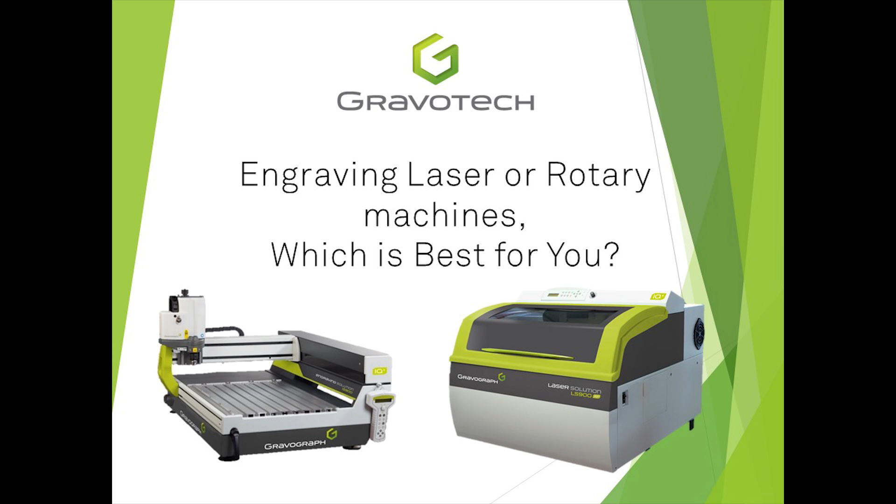So let's get started. During this presentation, we will touch on just a few minutes of who we are, then a look into how to improve your bottom line with laser and rotary machines. We'll dive a little bit deeper into laser specifically, and then we're going to take a look at rotary machines so you can compare the two.

Okay, so who is Gravotech? Why are we qualified to educate you on laser and rotary engraving machines? Well, whether you know it or not, every day, everywhere, Gravotech is in your life. Since 1938, you can find us in the engraving on your jewelry, the VIN number marked on your car, signs in any office, your child's trophy, a serial number on a medical device, and even implants inside someone's body.

How do we do this? Well, Gravotech is built on 3 outstanding brands. Type 3 is our software brand, focusing on 3D artistic CAD/CAM solutions, like designers working on 3D modeling or anything from engine parts to jewelry. Technifor branded products focus on dot peen, scribing, and the latest laser technologies to mark and identify products in the manufacturing sector. And finally, Gravograph products are focused on laser and rotary engraving machines and engraving materials.

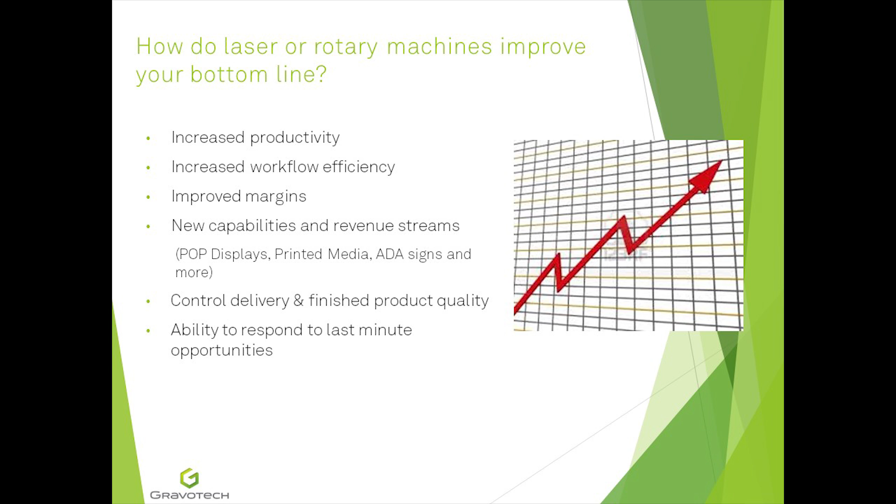You also control the delivery and final quality of the products from your company. When you outsource products, deadlines leave no room for error or last-minute changes. Engraving machines give you the ability to capture last-minute requests and demonstrate a new level of flexibility to your customers.

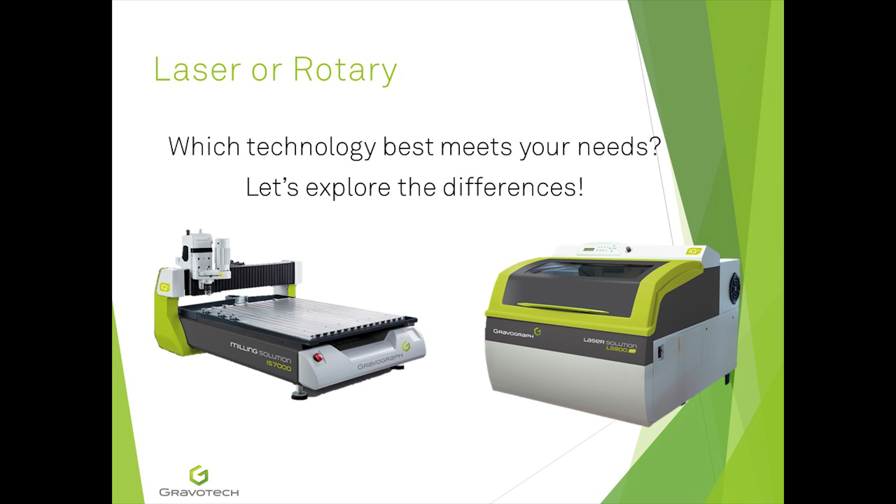So the question is, laser or rotary? Which one to pick is a decision many sign fabricators and engravers struggle with. Let's look at each one so you can have a better idea of what might be best for your company.

So there are 4 different types of lasers from Gravotech. We have a CO2, green, hybrid, and fiber. Depending on the model, these lasers are available in Gantry and Galvo styles. Galvo machines are stationary and can be integrated in multiple positions with extremely fast cycle times. A Gantry laser is a bit different as it moves the laser optics along the X and Y axis over top of the material. The Gantry type machines are what most people today will need.

The Gantry laser is contained within a safe Class 1 cabinet, allowing it to be used anywhere, even in a storefront. So a CO2 laser is very popular for use with signage materials such as wood, rubber, plastic, leather, and minerals such as glass and ceramic, etc. The CO2 laser is also capable of working with certain plastics and covered metals. There are 6 standard sizes and over 25 power levels in the Gantry version.

A green laser is a new innovation from Gravotech. It uses cold marking, which applies minimal heat to the product, which reduces the mechanical stress and distortion to the parts. The green laser can also create extremely small, high-resolution marks with the smallest of sensitive components. Silver, gold, plastic are just a few of the materials that react well with this particular laser.

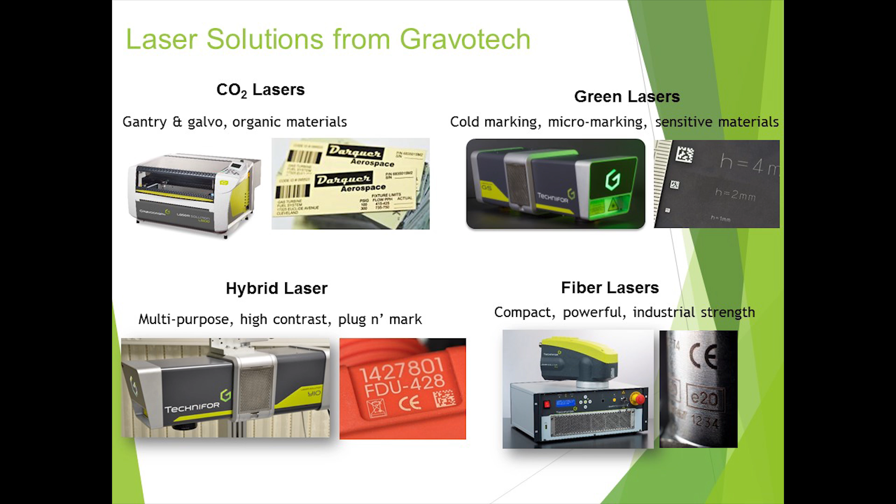And lastly, fiber lasers are ideal for deep engraving. The fiber actually works well with a wide variety of products, but extremely well with uncoated metals.

Let's discuss more about gantry lasers. You will hear a term called class. This defines the safety level of the laser.

Class 1 means the laser energy is completely contained within the cabinet and cannot escape. Class 4 is the opposite end of the scale, where the laser beam is not contained and could bounce off the material and hit something else.

We always recommend only experienced laser users use a Class 4 laser. It's just the safe and smart thing to do.

Pictured here is the Gravograph LS1000 XP. It is a gantry, large format, Class 1 CO2 laser with Class 4 options.

Operator safety is protected with the Class 1 enclosure design. For safety purposes, lasering stops when the cover door is opened.

This is a standard feature with our Gravograph lasers, but be careful when shopping, as there are lasers in the marketplace that don't have this basic safety feature.

It also includes an emergency stop button on the front of the machine for added security. Class 4 operation can be accessed through a unique security code that the owner controls. This Class 4 access allows for oversized materials to pass through the laser and be engraved.

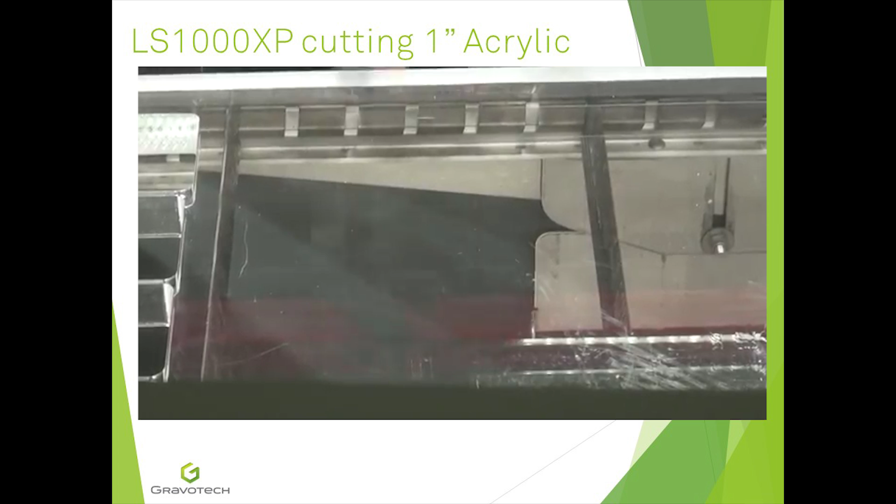Here's a quick video of the Gantry CO2 LS1000 XP engraving and cutting 1-inch thick acrylic to create a football helmet. This is a great example of how you can not only create signs and lettering, but other objects and displays as well.

The lens first autofocuses to give the most precise cut. Then it travels along the X and Y axis, releasing the laser energy at the precise moment to create letters, images, designs, etc.

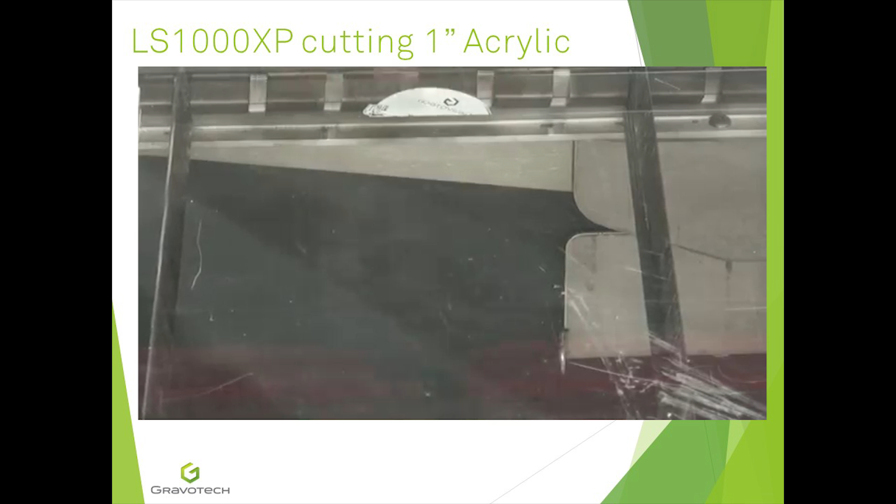You can now start seeing the football helmet design.

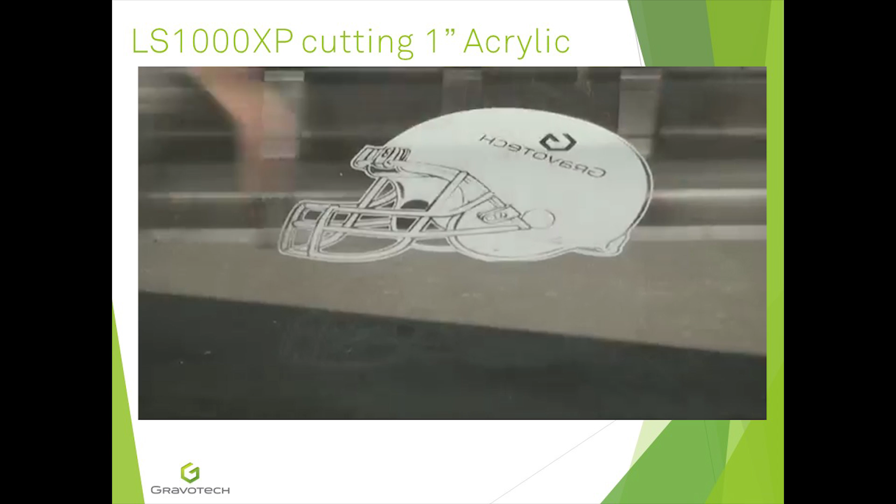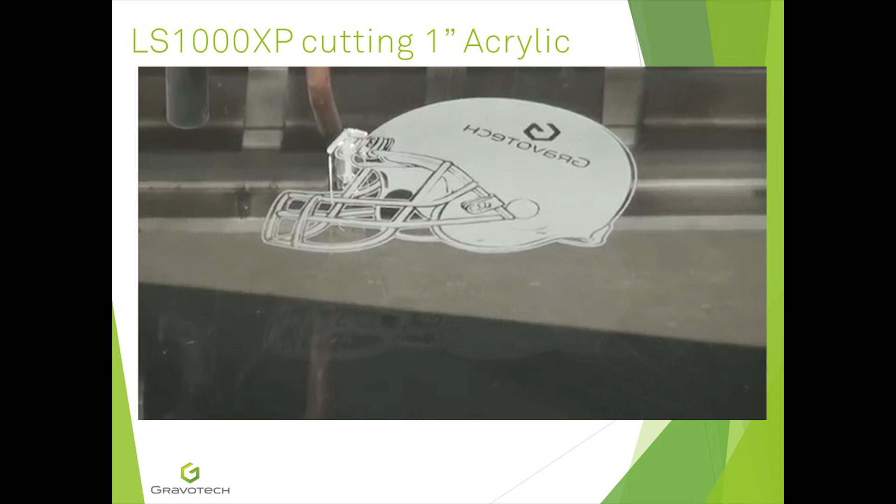Now the laser must cut out the design it just engraved. You can see how easily it cuts through 1-inch acrylic like butter. Using the laser to cut the acrylic produces a desirable flame-polished edge.

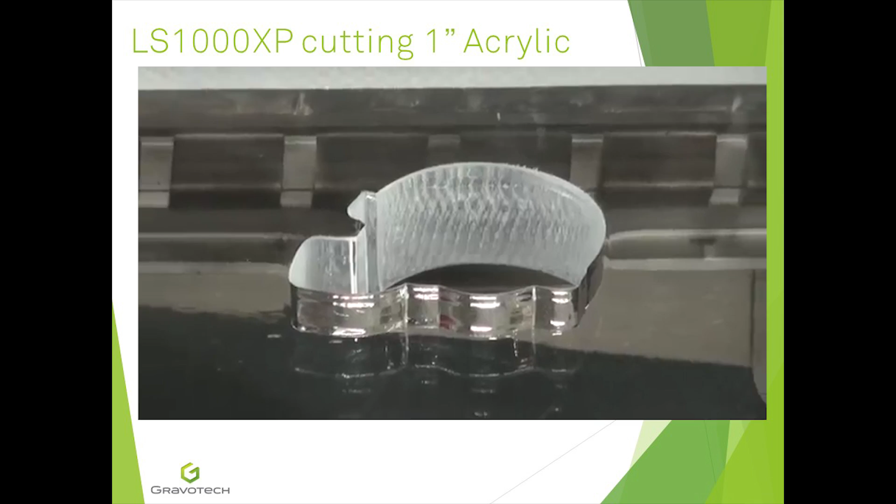The cut piece falls into the collection tray for easy retrieval. Now we have a beautiful gift or display piece.

Not only can you create cool designs with a laser, you can use it to increase your productivity. The lens of the laser can travel over the material up to 157 inches per second. This is very fast movement, saving you time and therefore money.

There is also minimal cleanup after using a laser engraver. Since the material is vaporized, it doesn't leave any shavings or excess material to clean. Also, since the only contact with the material is a light beam, materials don't have to be secured in the same ways as rotary engravers require.

We'll discuss this a bit more later on. But with a laser, you can produce large quantities of small pieces in the same batch. If you look at the top right image, you can place multiple color pieces in the laser bed and run multiple jobs without having to load and unload material.

Many sign makers need to produce small labels. Gravotech has created a way to make collection of these pieces quick and easy.

The LS1000 XP comes standard with fin cutting tables and an angled collection drawer. This allows cut pieces to drop into the drawer and fall towards the middle.

It also enhances airflow around the material, creating a better cut as opposed to typical honeycomb tables.

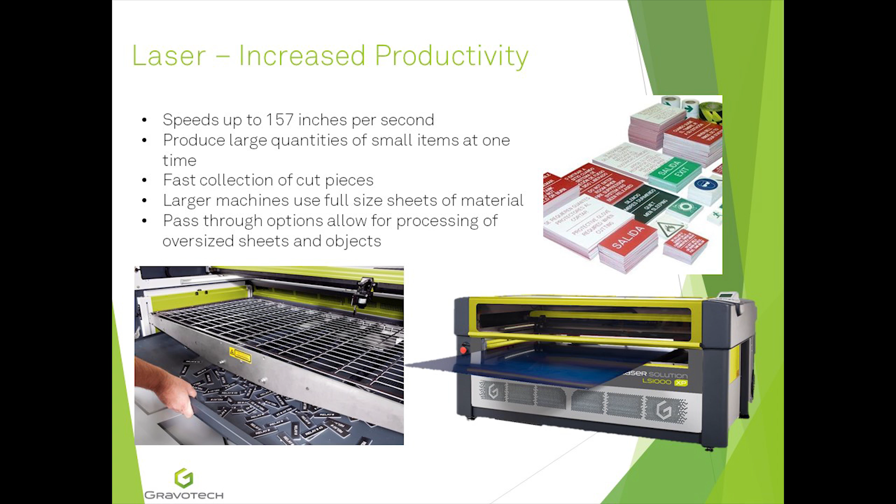There's also an X and Y pass-through, as mentioned, that allows oversized materials to be engraved with ease. You can see an example of the front door of the Y-axis in the image to the bottom right.

Now let's talk a bit more about saving money in sign production. In order to get the most out of your materials, you need to group letters together, which takes time and experience. Nesting is a term to describe placing letters as close together as possible to minimize material usage.

Gravotech's Gravostyle software uses professional nesting. Compared to standard nesting, it is better at maximizing the total use of space in the material.

Even smaller letters nest inside larger letters just to use more of the material. You can see standard nesting on the right and professional nesting on the left.

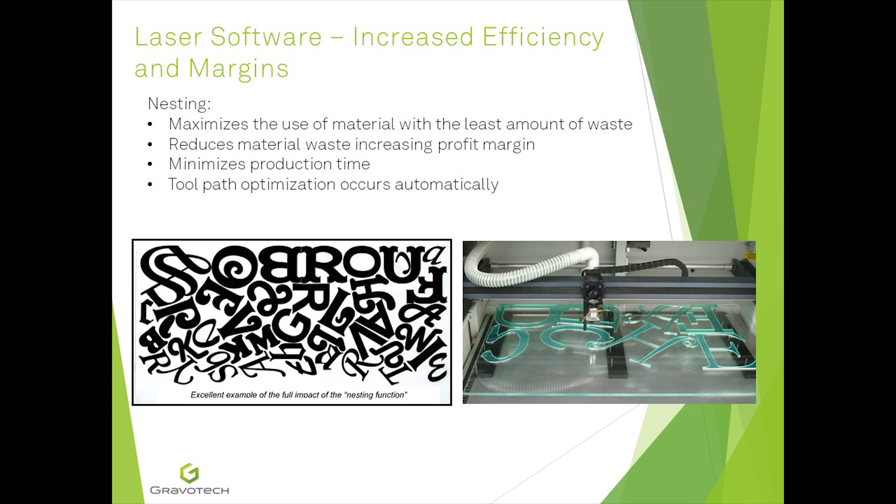The software will even go in and optimize the tool path to cut the internal letter segments first, preventing premature dropouts and minimizing production time.

Most of you listening today own, manage, or work in a sign shop. However, there are more avenues for your laser than just signage. Diversifying your offerings not only gives you a competitive advantage over your competition, it allows you to stay stable during rough economic times. If signs are slow, you can create intricate specialty design projects that command a premium upcharge and really unleash your creativity.

Here you can see some examples of specialty items such as ceramic tiles, glassware, 3D models, and even engraved cigars, coconuts, and leaves.

Your new revenue streams can expand even further. POP displays are a great way to advertise. Cutting printed media for these POP displays will be discussed more in a moment, but industrial asset tags and gaskets, control panels, rating plates, and more create new and repeat revenue opportunities when other markets are slowing down.

Control panels and rating plates are usually something that companies order multiple times and in large batches. When you're down a little bit on some signage and you need to keep your machines running, stock up on your rating plates and control panels, and that way when your customers are ready to go, they're on the shelf and waiting for them.

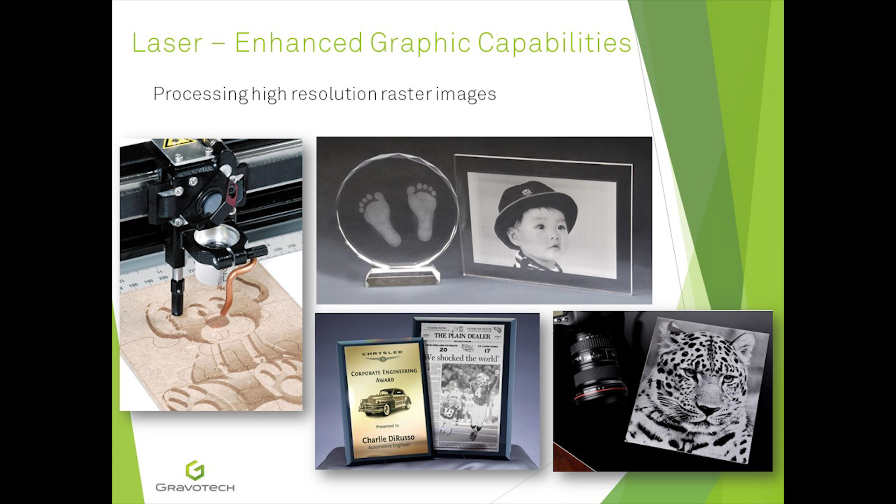Let's take a deeper look into making a puzzle piece from a photograph. Here you can see we used Gravolase plastic, an LS100 with Gravostyle, and a high contrast image.

The first thing we would do is place the material in the laser. We made sure to use a honeycomb table to enhance the airflow of the laser, allowing for a cleaner cut. We then go to the Gravostyle software. This video was made with an older version of Gravostyle, but all of the functionalities of this job are the same, if not better.

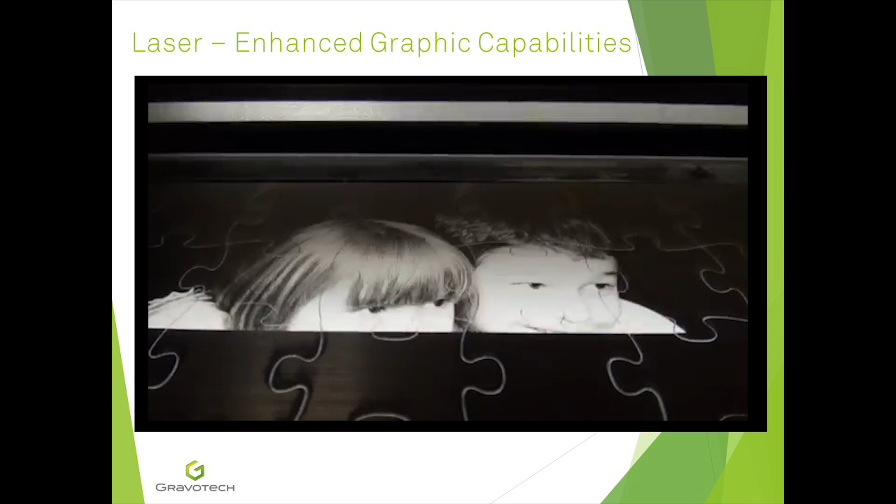Now you can see the awesome finished piece using only 4 supplies: Gravolase plastic, an LS100 laser, software, and an image. Simple as that.

Cutting printed media is another great advantage with the laser. You can precisely cut out shapes, letters, logos, etc. that would have been more difficult with other methods. Let's watch a quick video to show you how simple it is to use a Gravograph machine and the print and cut feature while even using CorelDRAW software.

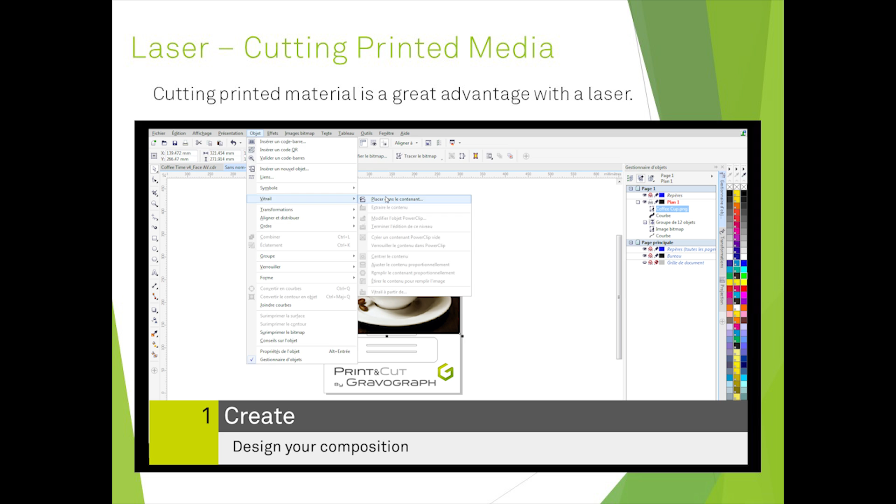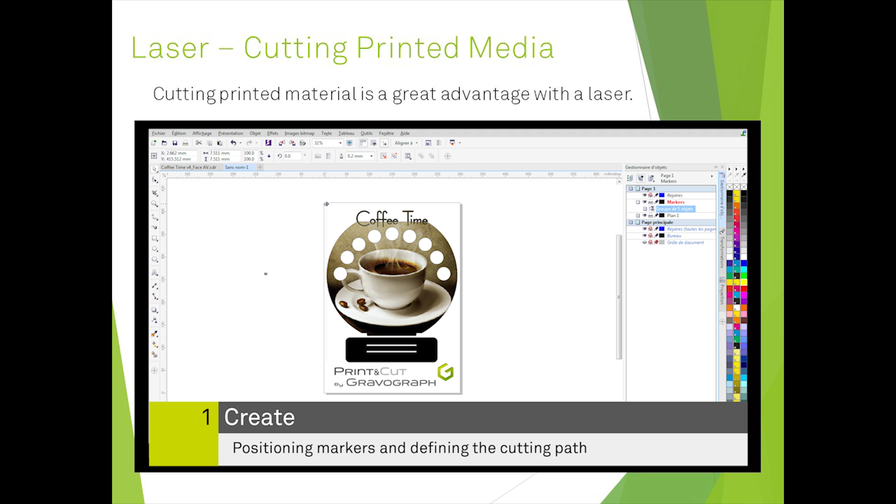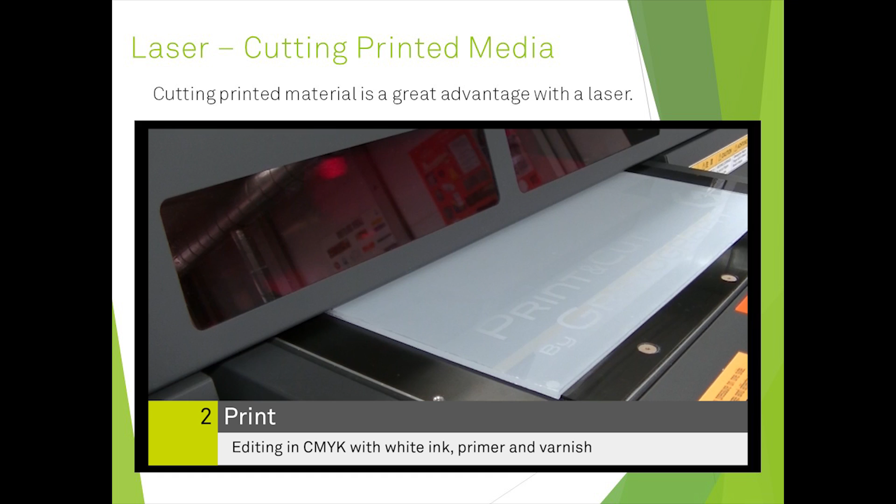We start by importing the image and design. In this example, we added an image of coffee. Next, we want to add the registration markers to define the cutting path for the laser. Now it's time to print. Be sure you print on laserable material. Now that your piece is printed, place it in the laser machine. Again, we used a honeycomb cutting table for enhanced airflow around the material.

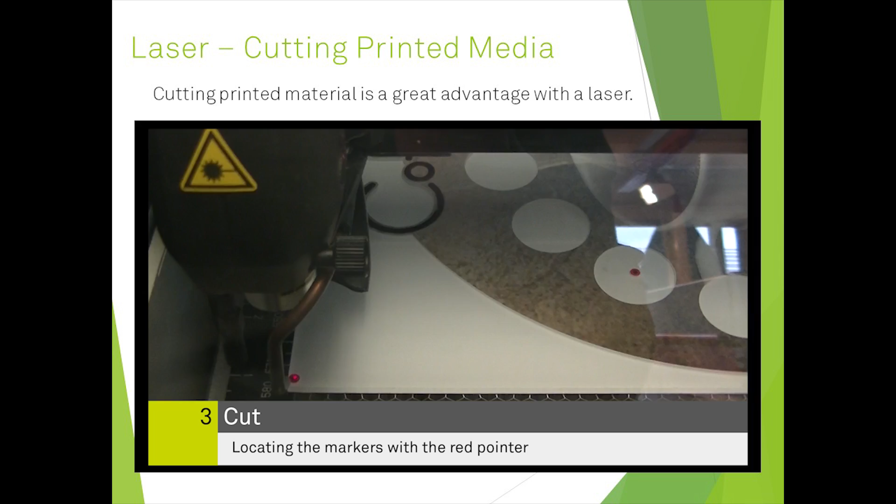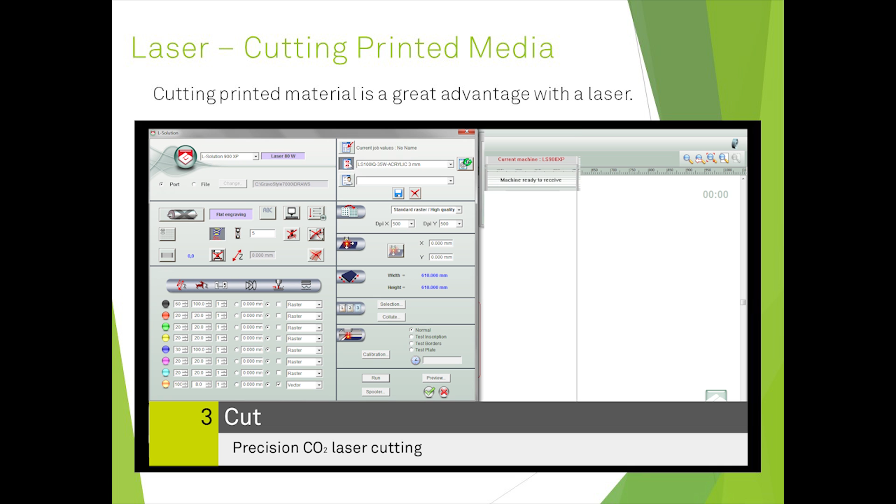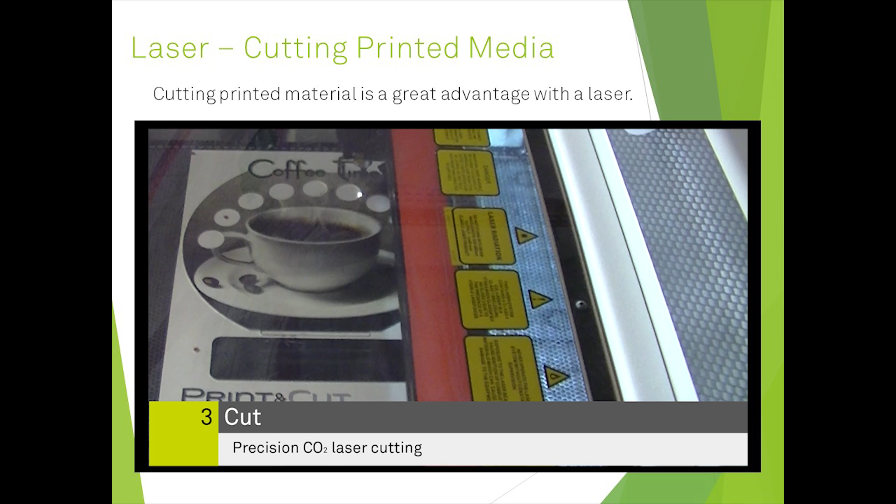Gravostyle can handle this type of project. However, some people prefer to use the software they've grown accustomed to. Gravograph machines won't hinder your business based on the software choice. However, Gravostyle does bring out more features of the laser rather than just what's available in CorelDRAW. After putting the pieces together, you have a wonderful POP display to encourage people to drink coffee.

By purchasing a laser, there are a lot of opportunities to make new products and profits, but what size and power laser do you need? This is a very important question, and you probably need to speak with a laser expert at Gravotech to really help you identify the type and quantity of work you're going to be doing. Generally, the answer is to purchase the largest machine with the most power you can.

It allows your business to grow into the laser, process jobs faster, and perform work your competitors would normally turn down. When considering the difference in monthly finance payments, having a system that's well suited to your growth needs over the coming 5 years may be the best investment.

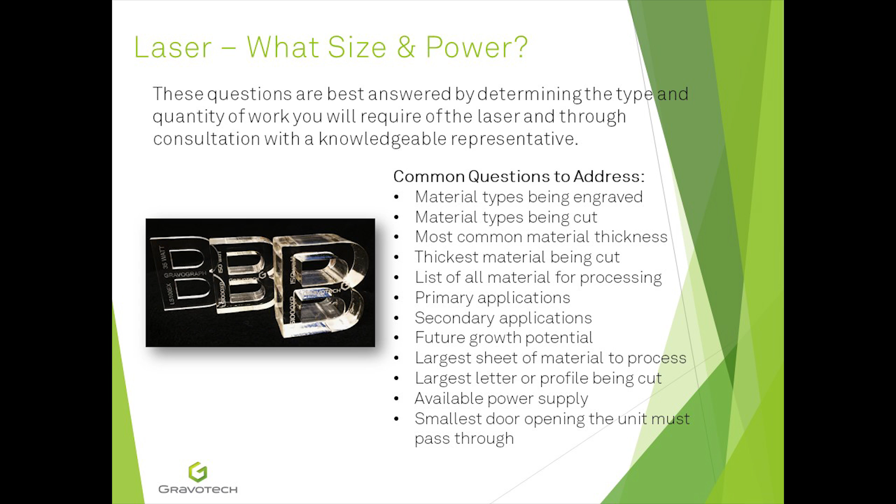Some common questions to ask yourself before purchasing a laser: what are the material types being engraved, and what are those same types that are going to be cut? What is the most common material thickness and the thickest material you're going to be cutting? You need a list of all the materials you will be processing, your primary and secondary applications, your future growth potential with the laser, the largest sheet of material you need to process, the largest letter or profile being cut, the available power supply in your shop, and the smallest door opening the laser has to pass through to get into your shop.

So let's review what we just discussed about lasers. We began with the multiple types of lasers available, but specifically the lasers geared towards sign makers, cutting 1-inch acrylic to produce products while also producing a desired flame polish edge. A laser also provides increased productivity, efficiency, and margins. You can expand on current capabilities while taking your graphic offerings to a new level. And let's not forget about controlling the finished product.

Choosing the correct laser for you is a difficult decision, and we recommend speaking with a representative to give you a really good idea of what size laser really fits your needs.

Now that we've talked about different lasers, let's change a little bit and talk about the different rotary engraving machines. Rotary engraving and cutting is another very popular form of engraving. Rotary engraving is the term used to describe engraving done with a rotating cutting tool in a motorized spindle. The tool, or cutter, cuts into the surface of the material to a predetermined depth and produces a groove of the same shape and dimension as the cutter. Rotary engraving can be performed on a wide variety of materials, including plastic, brass, aluminum, and much more. It can be found in the awards industry, industrial manufacturing, signage manufacturing, and more.

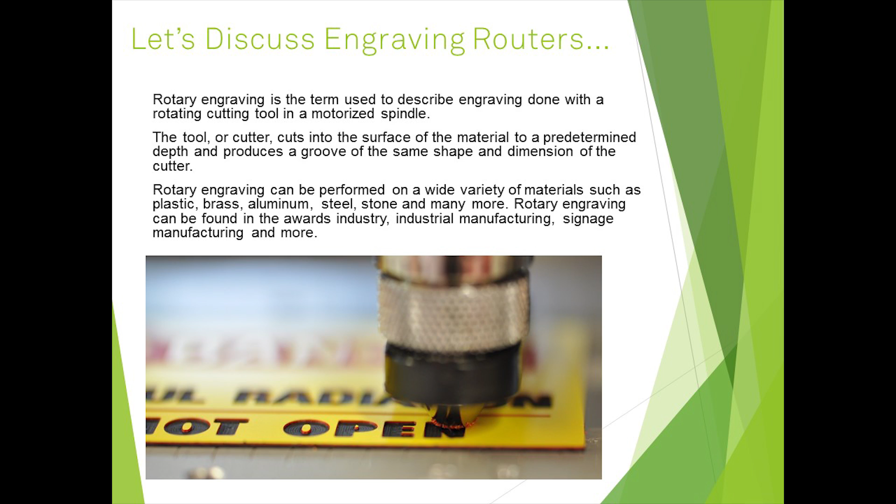Just like lasers, router options depend on the material and volume of production you will do. Options include the table size for the amount of pieces to produce at one time, the engraving head, router attachments, and high-frequency spindles. In most cases, the material must be secured by clamps, tape, or grab-a-grip since there is a moving part making contact with the surface of your material.

Routers can typically offer greater flexibility in material processing, but depending on the material being processed, sound levels can be a point of consideration. A laser and rotary expert at Gravotech can really help you identify the best machine based on the material and quantity of work that you will be doing.

With a Gravograph rotary machine and Gravotech sign material, one machine can produce your ADA braille signs. When using these, you can typically produce these signs in about 5 steps. One large advantage of having a rotary engraver over a laser is creating this ADA signage. Both methods can cut tactile lettering, but lasers cannot properly drill the braille pockets and insert the braille beads automatically.

Let's now go a bit deeper into ADA signage and discuss the 5 steps to produce these signs. The process begins by using 2 pieces of plastic with contrasting colors. In this example, we used white and blue Gravotech. These 2 pieces of plastic must comply with ADA guidelines. These guidelines state that the profile material must be exactly 1/32 thick, while the backer material must be at least 1/16 thick. Adhesive is placed on the profile material and the 2 pieces of plastic are sandwiched together. This completes step number 1.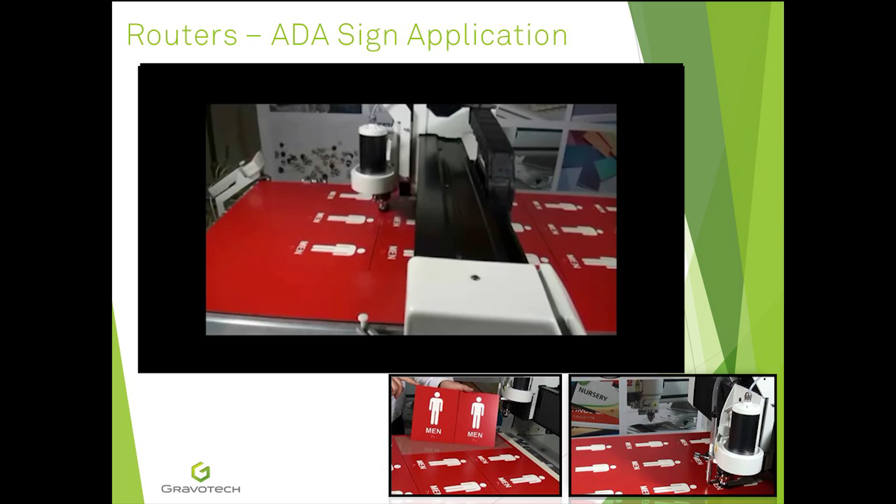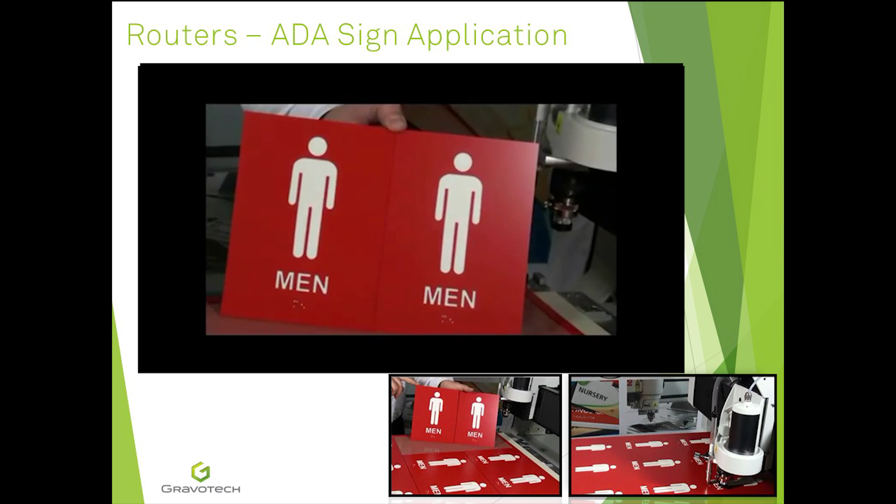Rotary engravers, not unlike lasers, can expand on your current capabilities. One major difference is the ability to cut metal and PVC plastic. Cutting metal with a laser involves a very high and expensive wattage, while cutting PVC with a laser releases a toxin that is harmful to the laser and the operator.

You can also enhance your rotary engraving by enlisting the help of a router attachment. This gives you the ability to do more heavy-duty routing and cutting and provides a really distinctive look some customers prefer.

One noticeable difference between rotary and laser engravers that we mentioned earlier is the use of a tool or cutter versus the light beam to engrave the surface. With a rotary engraver, you have more freedom for the type of mark you want to create based on the cutter type. Based on the size letter you want to create, you need to decide what tip size you're looking for with your rotary engraver.

Gravotech created this wonderful little cheat sheet for you to help make that decision. And there's a copy of this in our materials catalog if you'd like a copy for yourself.

So back to a little bit more about cutters. One of the most traditional and multi-purpose cutters is called the carbide cutter. It's great for plastic, acrylic, phenolic, soft and hard metals, and more. To engrave glass, you would typically use a diamond-tipped cutter. A diamond cutter will tend to be sharper and will break through the glass surface better than a traditional carbide cutter. A carbide cutter really could chip or break the glass.

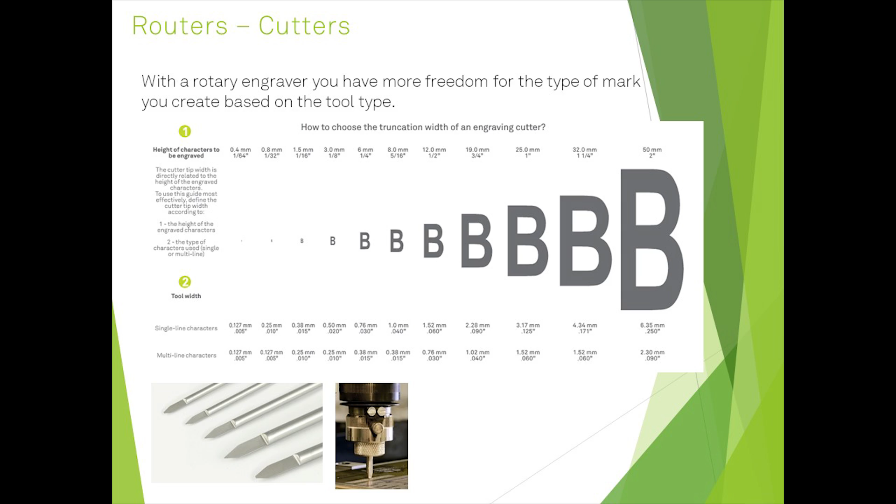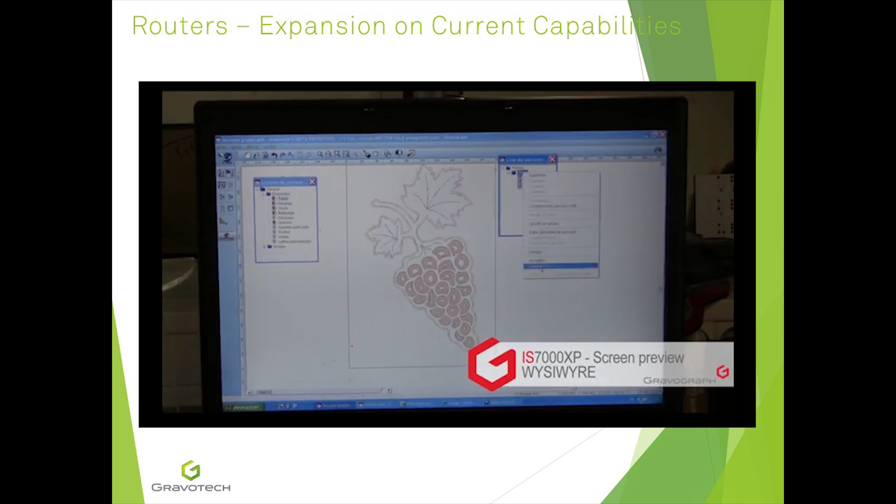Here we have a video of a rotary engraving machine cutting and routing brass into the shape of a grape cluster. A high-frequency spindle was added for some extra strength to prolong the life of the machine. Another benefit of using the rotary engraver for this type of job is the intaglio and prismatic lettering that can be accomplished.

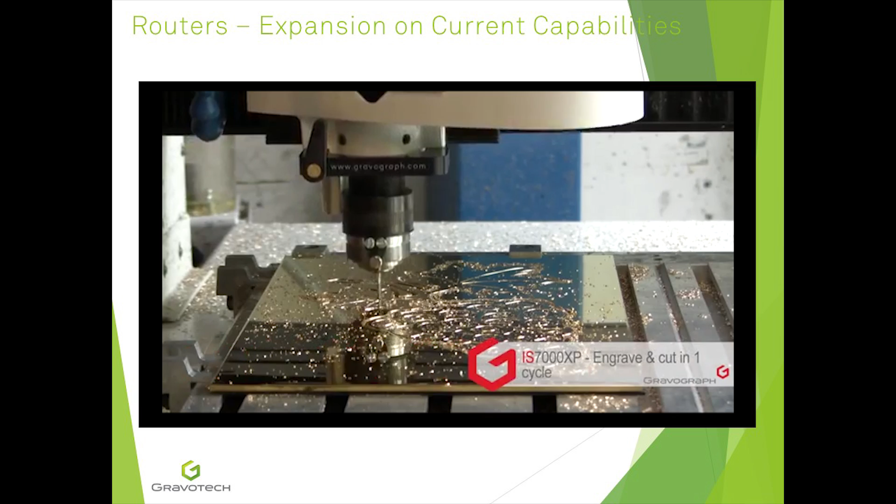Rotary engravers can enhance your daily workflow. In this application, the oversized wooden piece needs to be engraved and painted. The IS900, which is used here, has an engraving window of 17 inches by 25 inches. By using the Gravistyle's long plate option, we were able to produce a continuous sign that's about 6 feet long. The long plate multifunction allows the engraver to work in precise sections and then continue the design with a smooth transition.

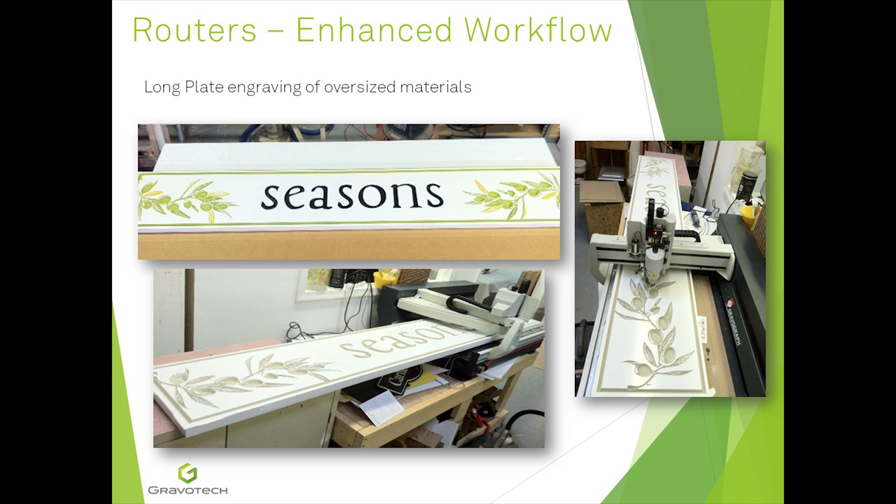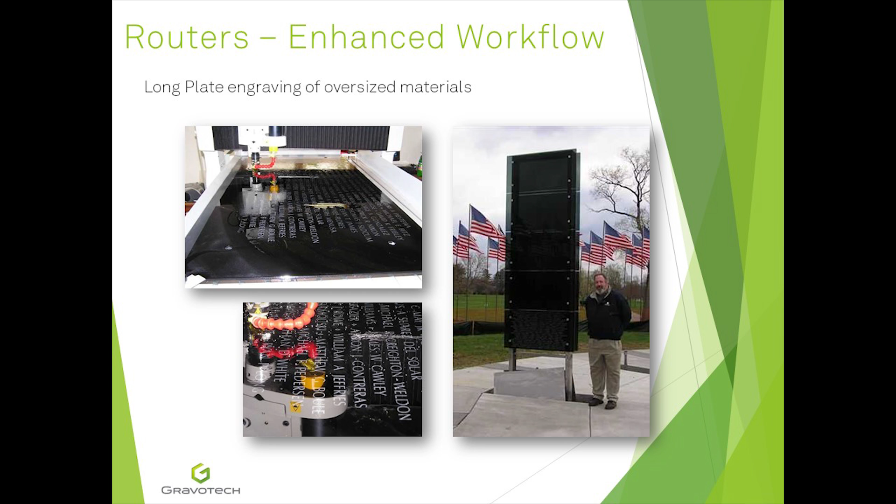Here we have another example of oversized materials being used in a rotary engraver. This particular application was on a memorial or dedication wall. The rotary engraver was the preferred method to facilitate pencil rub mementos by the visitors of the memorial site. Dedication walls can be used in all sorts of places, from churches and universities to art centers, hospitals, zoos, and more. Like we discussed, creating signage can be in many different forms, from ADA signs to memorial walls.

There are also so many other items that can be produced using a rotary engraver. Personalizing products is an ever-growing trend. The capability to engrave items on demand for a customer gives them instant gratification and makes them want to return and shop again. Popular engraved items include gifts, awards, funeral urns, pet memorials, and even hand-drawn images using the Dedicus accessory like you can see here for the keychain.

To summarize what we discussed about rotary engravers, they're great for ADA sign fabrication, allowing the entire process to be completed on one machine. The ability to cut metal and PVC materials, the numerous cutter or tool options, enhanced workflow, long plate functionalities, and of course, new revenue streams.

So with that, let's open it up to some questions. I see a good one here.